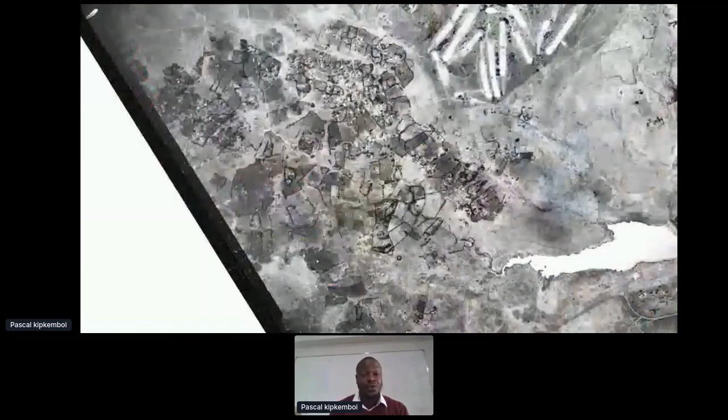We also have the history of where we are working, which is Kibera. As you can see, these photos show that in the 1940s we had only the Nubian community within that informal settlement, who were the first people to settle there. As you can see, there is a lot of open space, and on my far right there is a clear Nairobi Dam, which collects water from the Ngong River, and it was really clean by that time.

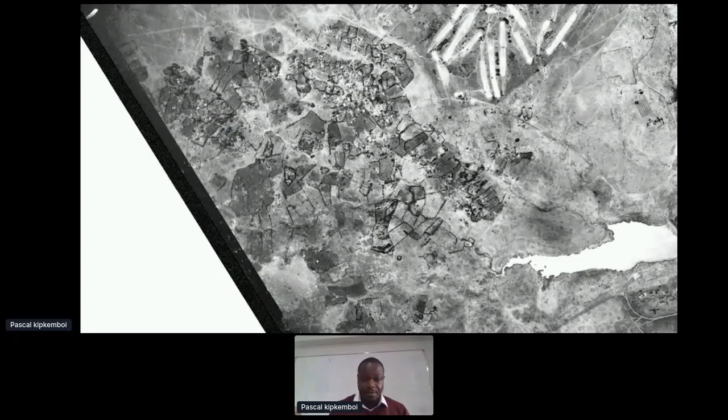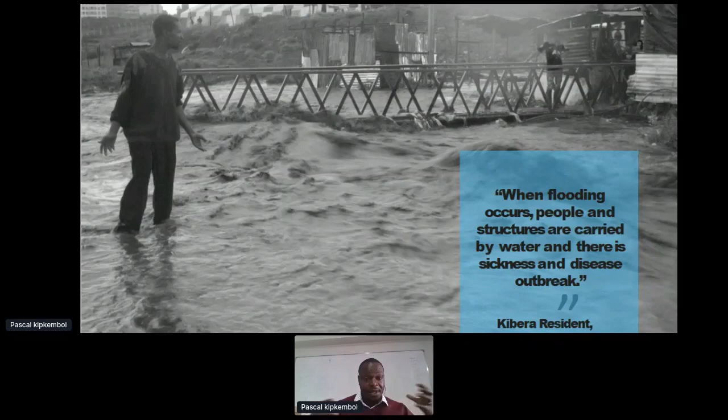Some of the challenges with the density and the changes from the 40s to 2015 up to now: the community faces a lot of flooding, with people and structures carried by water. There is also a lot of sickness and disease outbreaks that they face during rainy seasons, due to how dense it is and the waste management issues within those informal settlements, and how development from within the settlement brings all these challenges.

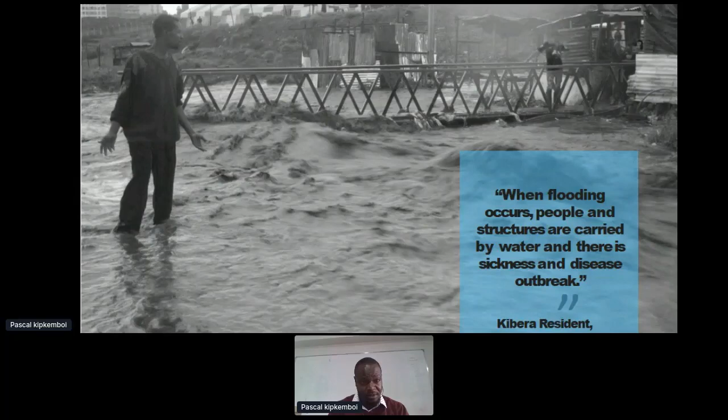So we've got a few lessons from one slum, three upgrading projects, that I will take you through. Those three upgrades are KENSUP, the railway line, and the NYS. The KENSUP project is the Kenya Slum Upgrading project. The type of project is housing, amenities, and enabling infrastructure. The lead government agencies were the Ministry of Lands and Physical Planning and the Ministry of Housing.

The scale of the project was 822 units in Soweto East, and 613 units in Langata, which was the decanting site where people were moved from Soweto East to Langata for a period of time before phase one was finished. The status of the project in 2018: Phase A was finished and people are already in.

The railway line project is the Nairobi Railway Relocation Action Plan. The type of project is housing, business units, and railway line reserve rehabilitation. The lead government agency is the Kenya Railways Authority. The scale of the project was 10,000 units, estimated at 30 million US dollars.

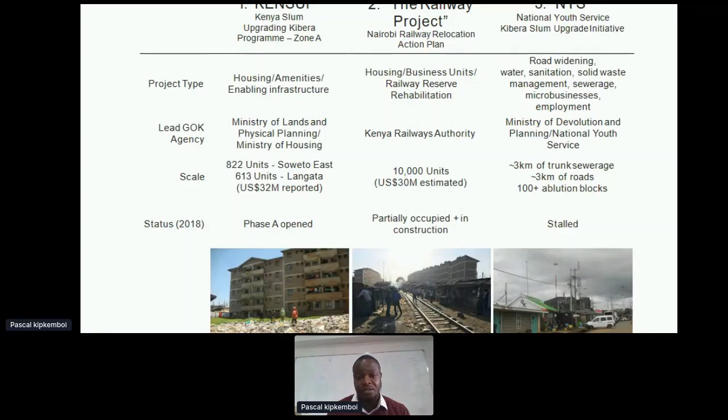The status of the project is partially occupied and still under construction in some areas, which stopped at times but is continuing.

Then we have the National Youth Service Kibera Slum Upgrading Initiative, which focused on road widening, water, sanitation, and solid waste management, sewer lines, and micro business employment. The lead government agencies were the Ministry of Devolution and Planning and the National Youth Service. The scale of the project was 3 kilometers of trunk sewer line to be created within that informal settlement, 3 kilometers of road, and over 100 ablution blocks within the informal settlement.

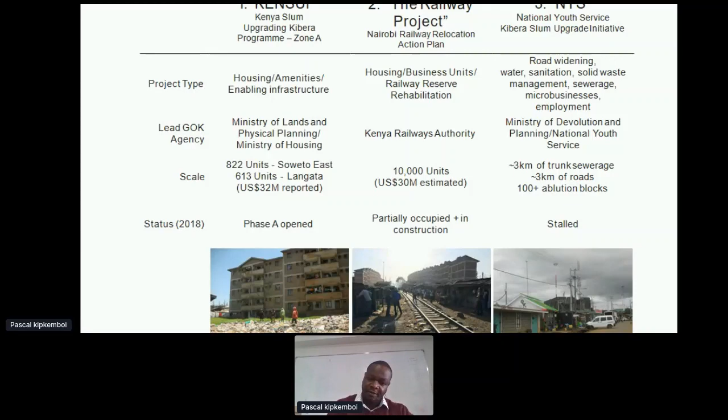The status of the project is stalled, and it's already incomplete. You can see the photos of those interventions on the bottom line here.

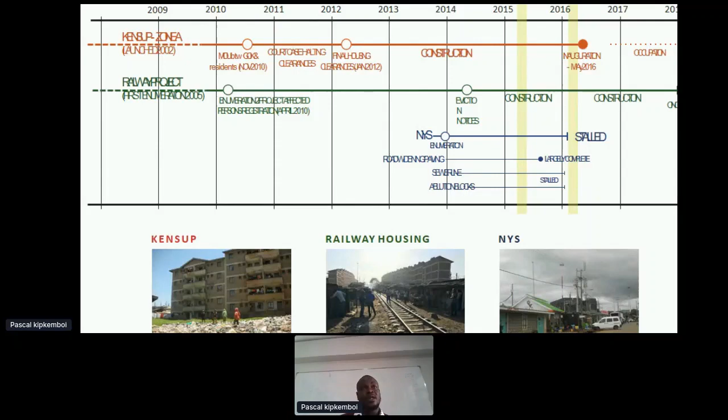The community engagement process for the railway line took place in 2010-2011, collecting the names of families, filing documentation, and going through the process. Construction began in 2014-2016, and by 2017 there was already occupation of some of the structures, with the project still ongoing.

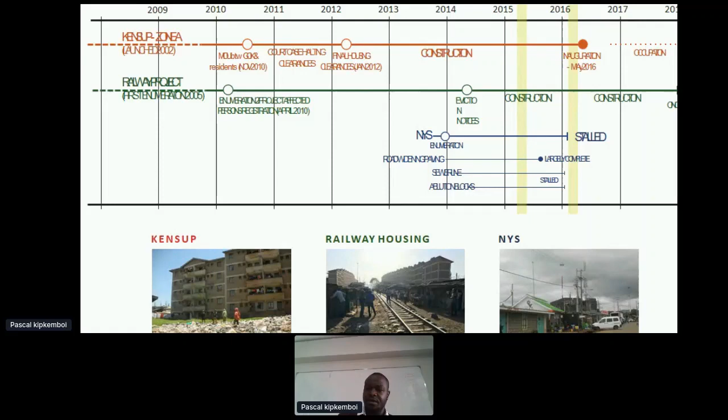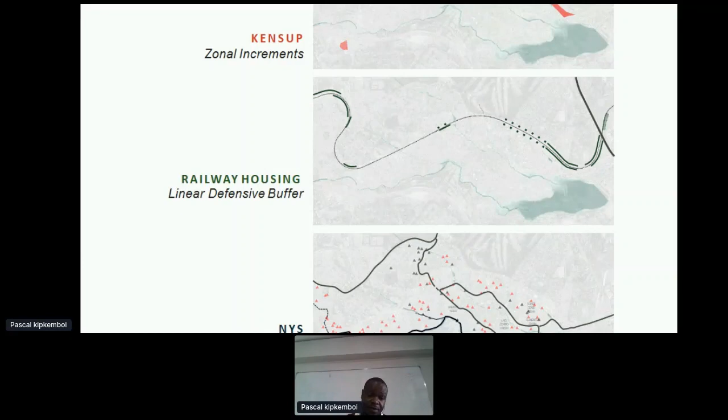This here is the KENSUP project photo, now incomplete in Zone A, Soweto East. This is the decanting site in Langata, where people were relocated to stay for a few years before getting back to Soweto East.

These photos tell the story of the railway line project, where the intention was creating a buffer zone due to some injuries, and we've got an incident of a train falling down and creating a lot of damage, with people trying to encroach on the railway line. So that is the intention, and you can see the picture tells it out.

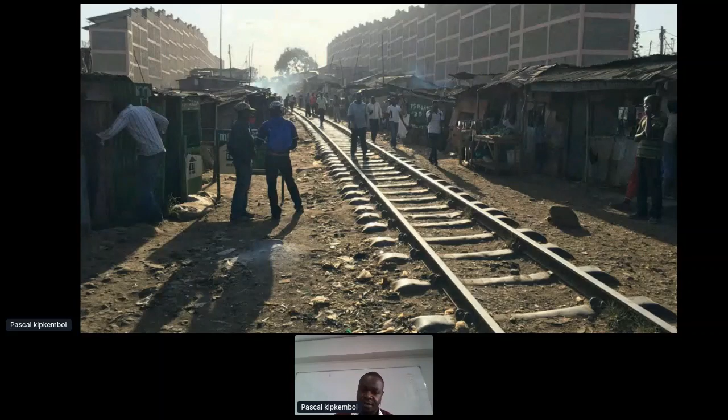After finishing, they already demolished all the structures within that area. And this is the NYS project. You can see there is an ablution block here and the road widening, which has brought a lot of changes within the informal settlement. We've got drainage and pathways that were already created through the NYS project.

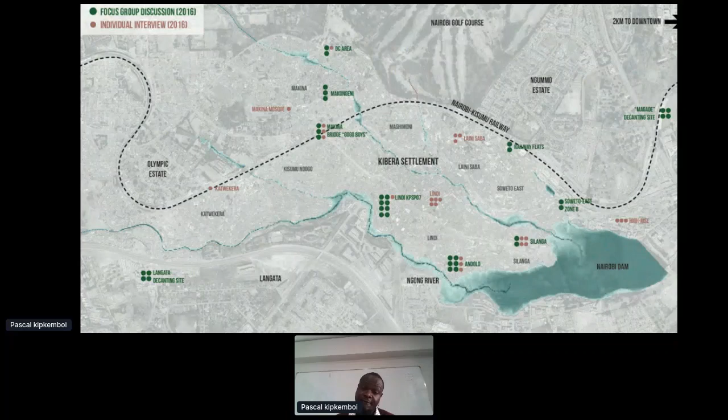We also did interviews plus FGDs within this informal settlement, in the 13 villages that are there, just to have a better understanding of how these interventions affect the residents, either their social cohesion or their social contract. So that is the intention of us trying to understand some of the challenges the residents are facing with this big intervention within the informal settlement.

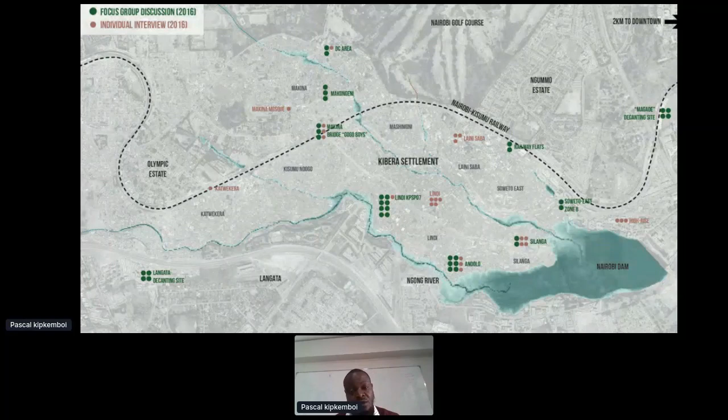We also learned about how these two different interventions, their approaches and processes, and also after the project, how the residents actually took the process.

And you can see clearly, on my right hand, the KENSUP project has very huge structures with less community relations. And as you can see on the railway line, it's already picked up - the residents have already started their businesses, doing their washing, and they have a walk path within that area.

So these are two different interventions, servicing the community in two different ways. And those are some of the learnings that we found out from these interventions.

We also got to understand how a multi-sectoral intervention, like the NYS, brings about different activities and different approaches, compared to KENSUP, which is more about just housing and residents having a good house, but actually having a lot of different gaps within that.

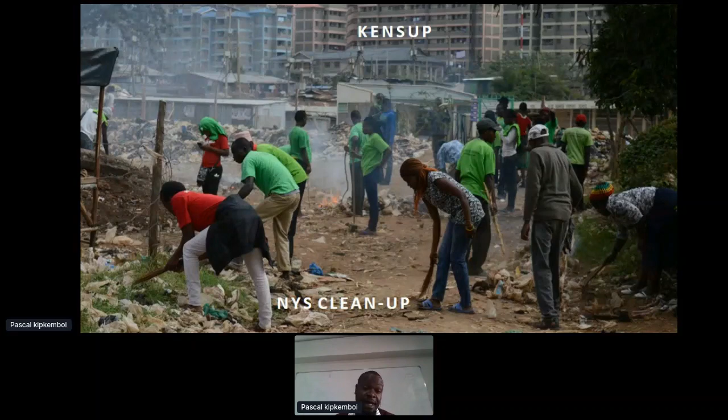This one here talks about some of the KDI work that we are doing within that informal settlement, and that is the research we started in 2016, trying to have a better understanding of how these interventions are being internalized by the community.

So we have a better idea - the blue dotted line is just asking them how good the intervention of the project was. And the outcome was, you can see the blue dotted talks about whether it was a good idea or not. Out of that, we got 300 saying it's a good idea.

We've got 31 saying it was not a good idea, and we've got 4 who responded that they don't know about it, and then we've got one who actually refused to answer that question.

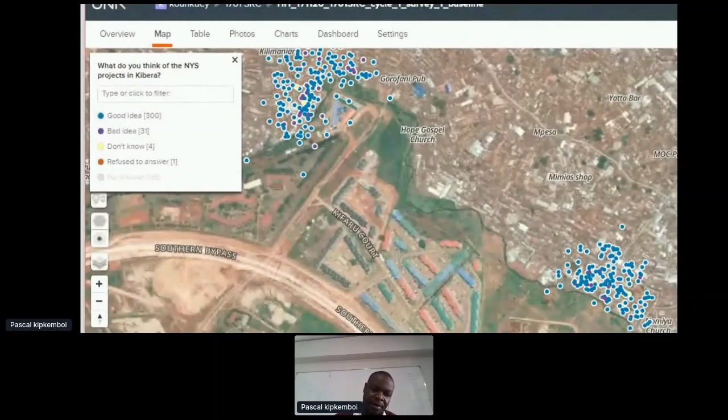So this is how we get to have a better understanding of how this big intervention impacts the livelihood of people in an informal settlement.